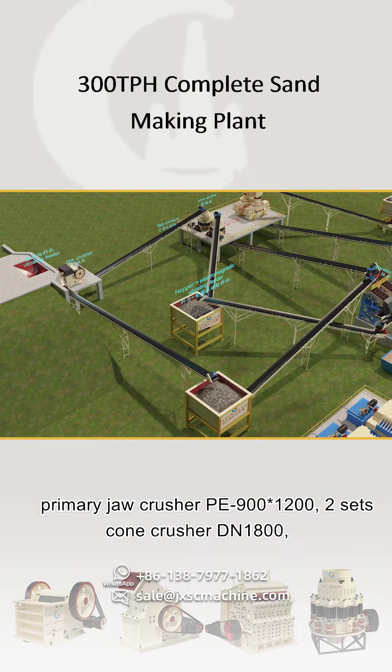This setup is a 300 TPH complete sand-making plant. The max input size is 780 mm, and output sizes are 0 to 5 mm. It is configured with a hopper, vibrating feeder DN5013, primary jaw crusher PE900*1200, 2 sets of cone crusher DN1800, 4 sets of vibrating screen, 2 sets of VSI sandmaker, and 12 belt conveyors.

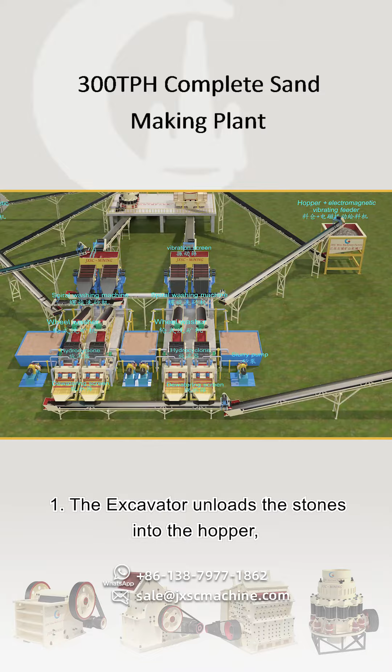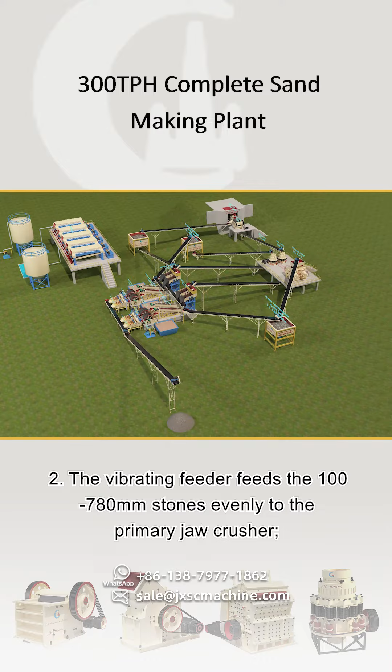1. The excavator unloads the stones into the hopper, and the stone enters the vibrating feeder from the lower part of the hopper. 2. The vibrating feeder feeds the 100 to 780 mm stones evenly to the primary jaw crusher. The vibrating feeder will be fitted with a 100 mm gap grizzly bar.

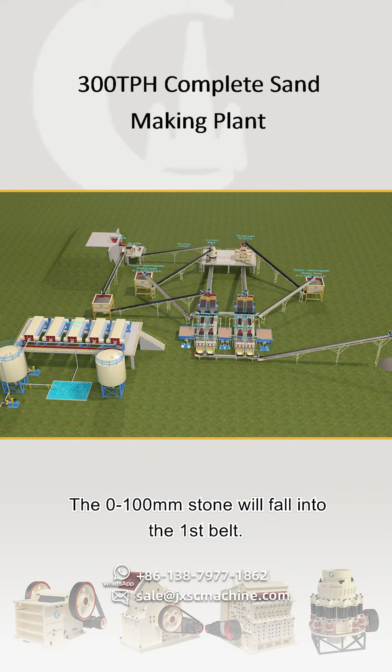The 0 to 100 mm stone will fall into the first belt, and it will be transferred to a transfer silo equipped with an electromagnetic vibrating feeder. The material will be fed to the hopper above the first and second vibrating screens by the second conveyor belt.

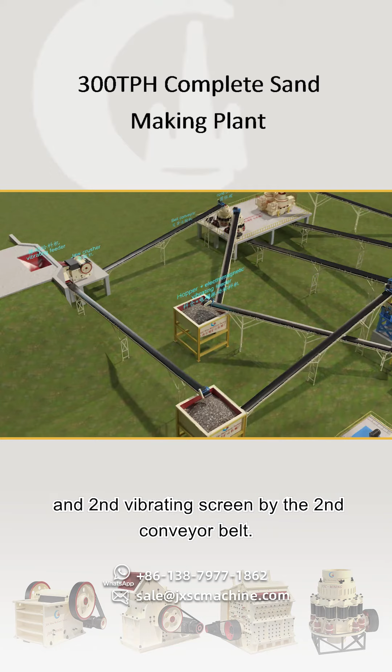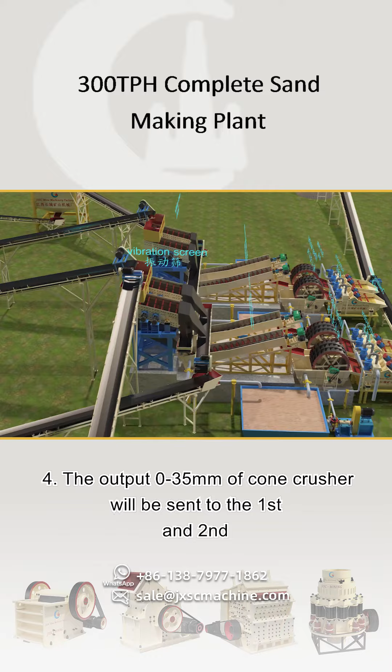3. The output of 0 to 200 mm from the jaw crusher will be transferred to the first set of cone crusher by the third conveyor. 4. The output of 0 to 35 mm from the cone crusher will be sent to the first and second vibrating screen to separate, by the fourth conveyor.

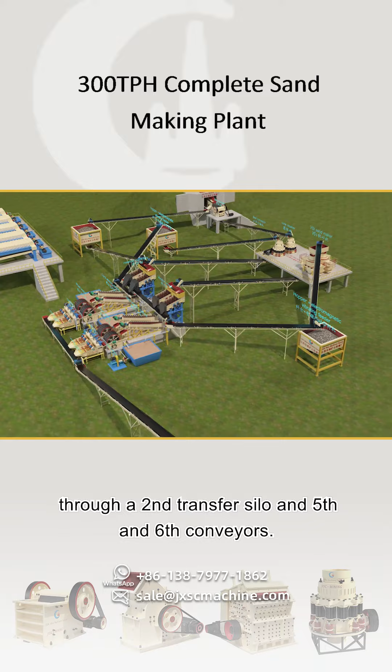The stones larger than 35 mm will be sent back to the second cone crusher to crush, through a second transfer silo and the fifth and sixth conveyors. The 0 to 5 mm sand will flow to the spiral sand washer to wash.

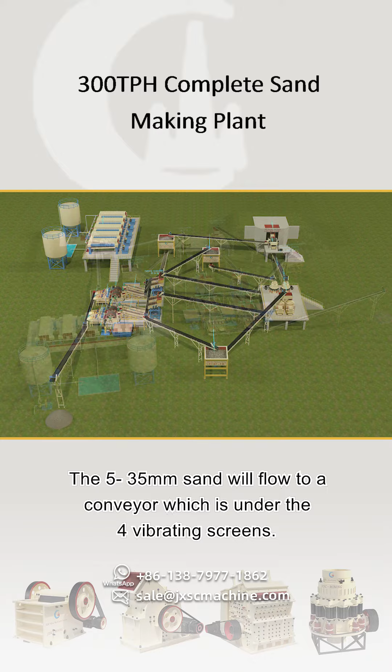The 5 to 35 mm sand will flow to a conveyor which is under the 4 vibrating screens. The conveyor will transfer it to the third silo and then to 2 sets of VSI sand makers to crush until it reaches 0 to 5 mm.

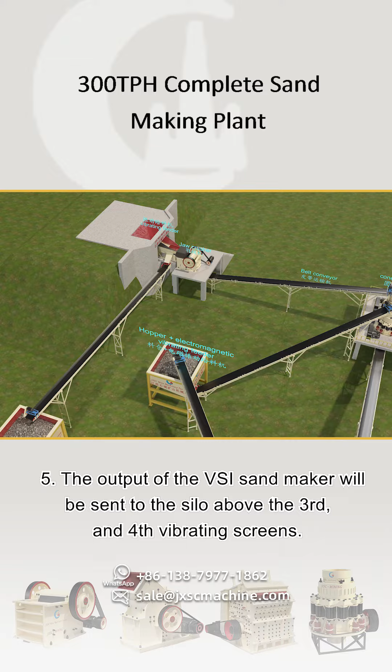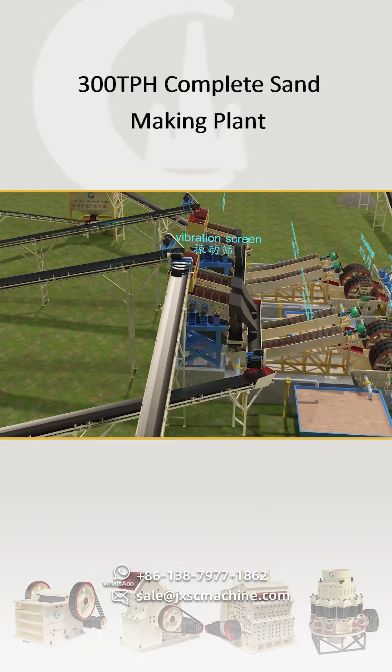5. The output of the VSI sandmaker will be sent to the silo above the third and fourth vibrating screens. The 0 to 5 mm sand will flow to the spiral sand washer to wash. The sand larger than 5 mm will flow to the under belt and be sent back to the VSI sandmaker to crush again.

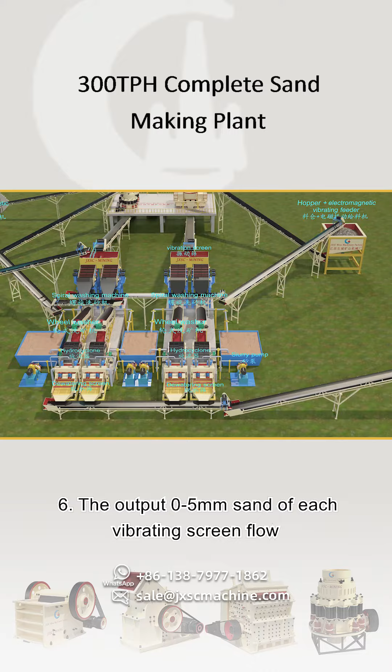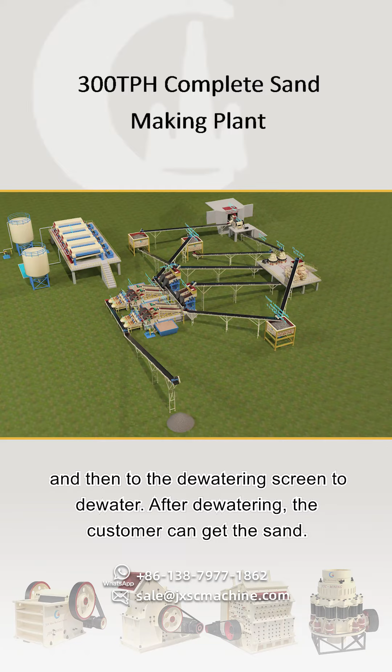6. The output of 0 to 5 mm sand from each vibrating screen flows to the spiral sand washer and wheel sand washer to wash again, and then to the dewatering screen to dewater. After dewatering, the customer can get the sand. 7. The tails will be sent to 5 sets of filter press to press.